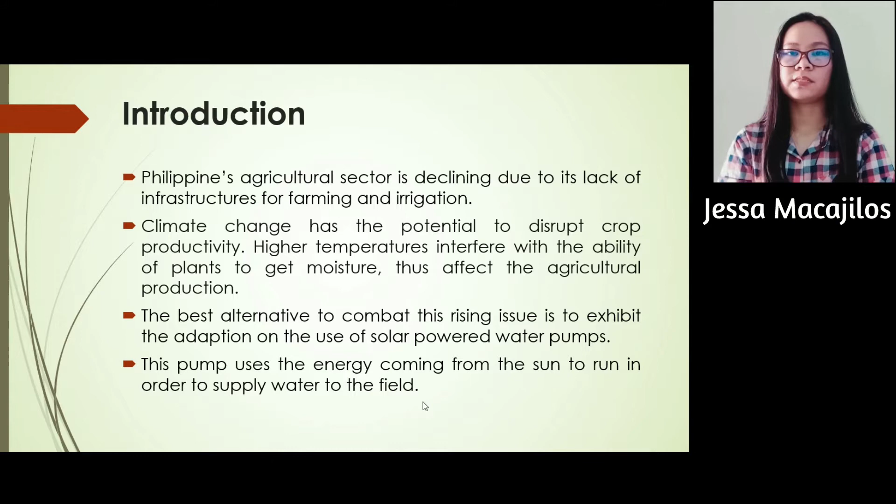The best alternative to combat this rising issue is to exhibit the adaptation and the use of solar-powered water pumps. This pump uses the energy coming from the sun to run in order to supply water to the field. An irrigation system that uses solar-powered water pumps is a great help to farmers, and it will give them hope that something better is coming on their way.

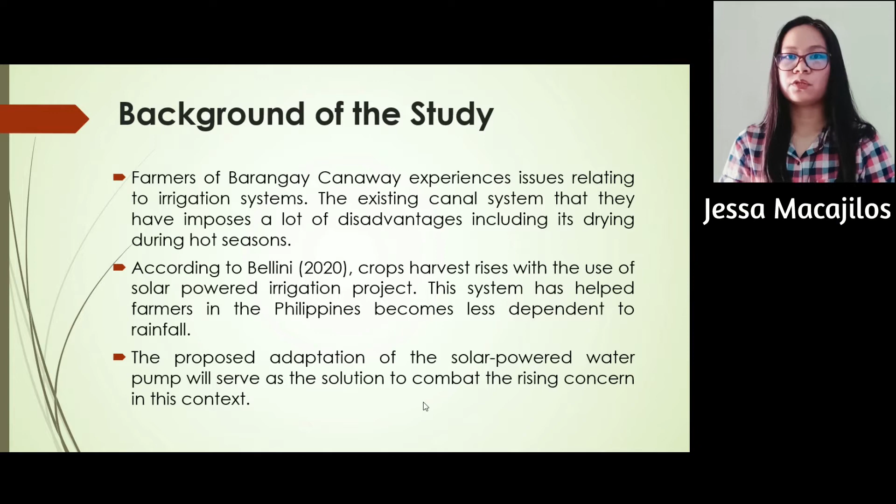Farmers of Barangay Canaway also experience this issue relating to irrigation systems. The existing canal systems that they have impose a lot of disadvantages, including its drying during hot seasons. According to Bellini 2020, crops harvest rises with the use of solar-powered irrigation project. This system has helped farmers in the Philippines become less dependent on rainfall. The proposed adaptation and the use of solar-powered water pumps will serve as the solution to combat this rising issue in this context. Statement of the problem.

This research study is solely based on the issue that the researcher wants to address. As stated, climate change has caused a tremendous impact to the lives and production of farmers. Every sector in the government is continually dealing on ways to address the concern. The constant rise of temperature due to global warming brings detrimental effect to the growth of crops. As a result, there is deficiency in food production.

Farmers in Barangay Canaway, located in a mountainous area in the municipality of Siaton, also experience this issue. This barangay houses different types of crops and vegetation that are affected due to global warming. The existing canal irrigation in the area imposes different risks and disadvantages, including the imbalances of the distribution of water, which lead to crop damages. On account of this, an adaptation to the use of solar-powered water pumps to power a drip irrigation in the area will be considered. Specifically, this research aims to answer the following questions.

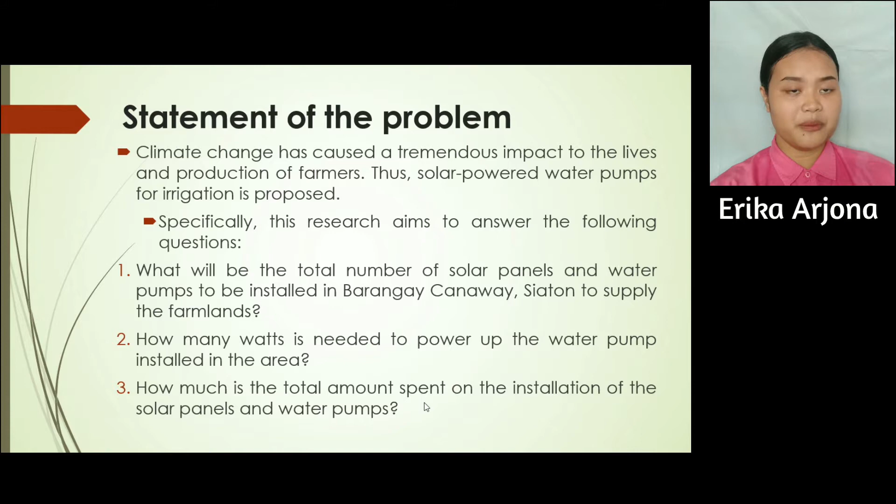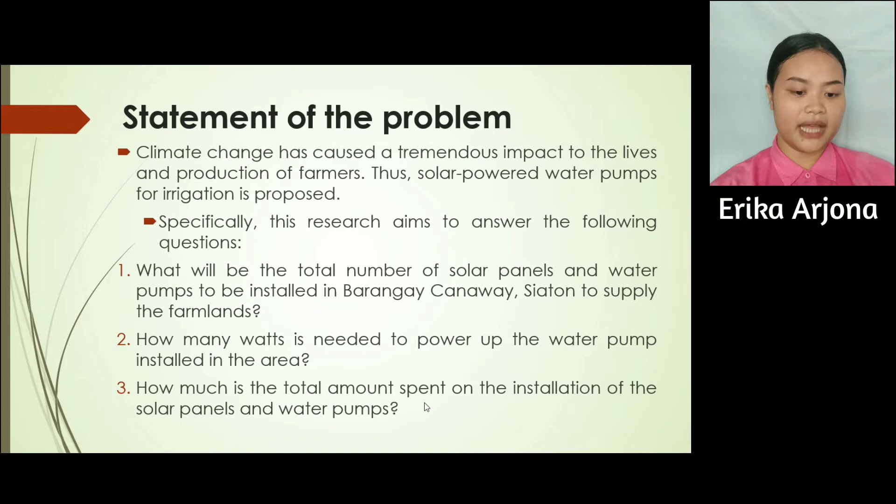First, what will be the total of the solar panels and water pumps to be installed in Barangay Canaway, Siaton to supply the farmlands? Second, how many watts is needed to power up the water pump installed in the area? The last one is, how much is the total amount spent on the installation of the solar panels and water pump? Scope and limitation of the study.

This study will focus on the adaptation of solar-powered water pump to supply the irrigation system in Barangay Canaway farmlands. Drip irrigation is used as a basis for this study because it is more efficient and has more benefits to the plants and to the system as a whole. For the purpose of this study, cornfields will be used. However, once the system is implemented, the operation will depend on the farmers on whatever type of irrigation and vegetation they want. The farmers of this barangay will be the respondents of the study where certain data will be gathered.

Moreover, it will provide the basic calculations to identify the number of solar panels required for a certain area of need as well as the water pumps. As this will focus only on the solar-powered water pump system, the implementation of the drip irrigation system will not be included. Implementation refers to how the drip irrigation is created. This part may be focused on for further researches.

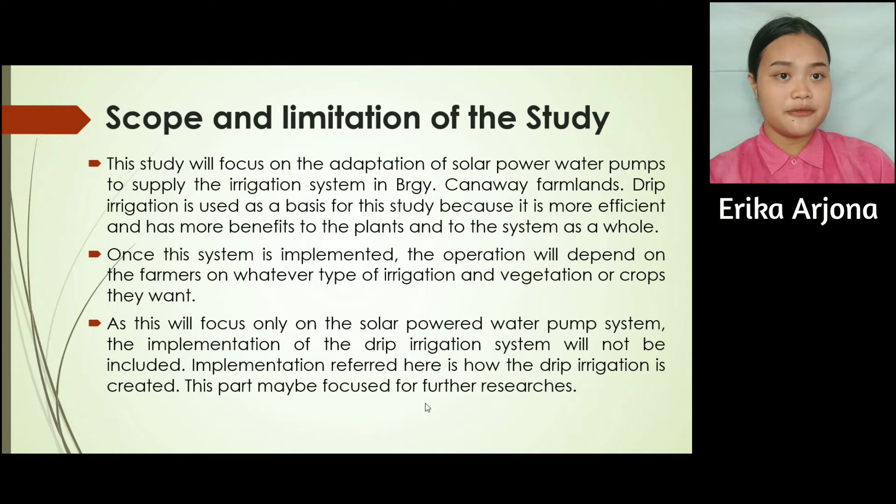The theory that is utilized in this study is based on the concept of the solar-generated electricity called photovoltaic and the working principle of the water pump. Photovoltaic system is composed of one or more solar panels combined with an inverter and other electrical and mechanical hardware that use energy from the sun to produce electricity.

French physicist Edmond Becquerel noted the photovoltaic effect, in which certain materials would produce a small amount of electric current when exposed to light. The smallest element of the PV panels is called the solar cell, also known as the basic photovoltaic cell. These cells combine together to form a panel which collects the renewable energy from the sun and converts it into electricity, which will then be used to power electrical load.

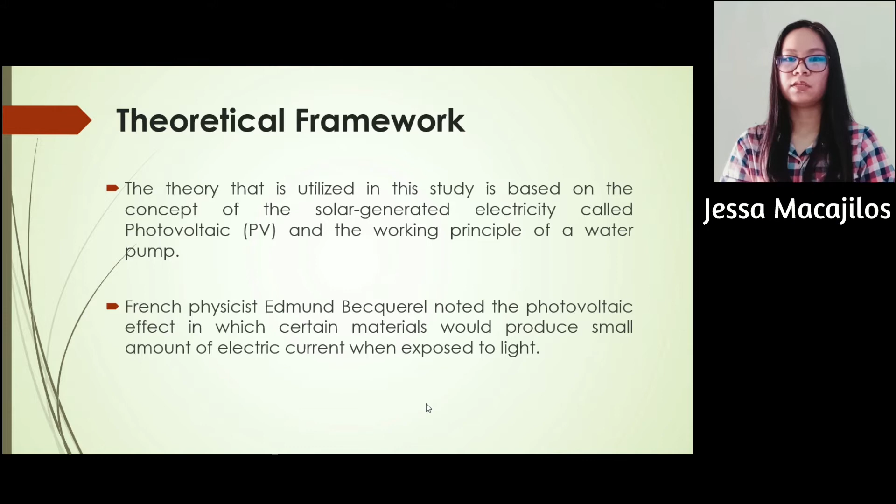The working principle of the water pump depends upon the positive displacement principle as well as the kinetic energy to push the water. The solar-powered water pumps integrate the combination of the two concepts concerning solar energy and water pump principles. The electricity produced will be used to power the entire system.

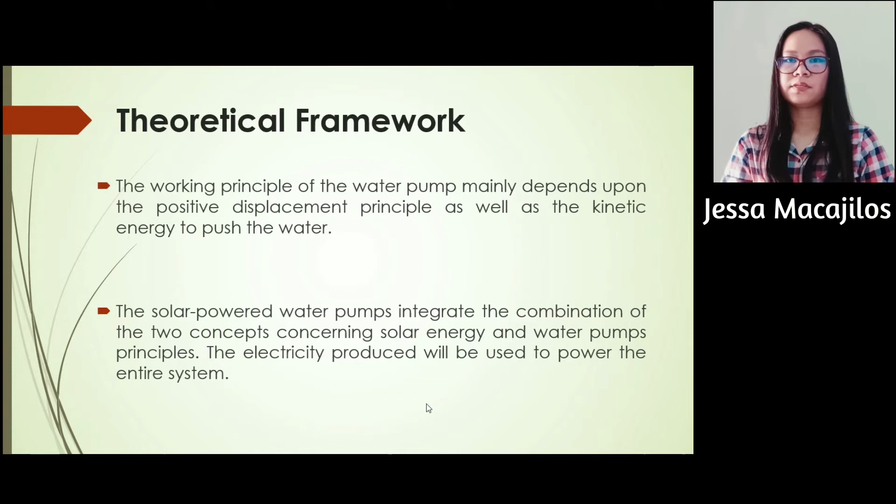The system will work through the utilization of the power coming from the sun through the use of photovoltaic panels. These panels convert light from the sun into electricity to be used to power loads. The amount of electricity generated will be dependent on the solar radiation of the place where the solar-powered water pump will be installed. Intensity of the sunlight striking the panel is affected by weather conditions and the topography of the area where the proposed system will be installed.

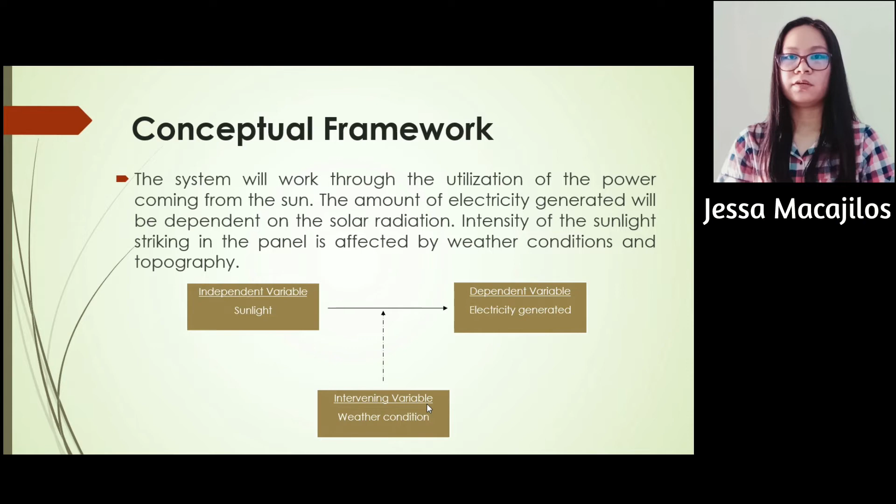The charge controller present is set to control the voltage and current to prevent batteries from overcharging. It regulates the voltage and current coming from the solar panels going to the battery. A rechargeable 12 volt battery is involved in this system so that electricity can be stored and the pump would still function even though sunlight availability is constrained.

Power is supplied by the batteries for operating the system. Water is pumped by the surface solar water pumps from the river to a storage tank, and the water is then drawn to the drip irrigation system to deliver water to the crops and vegetation.

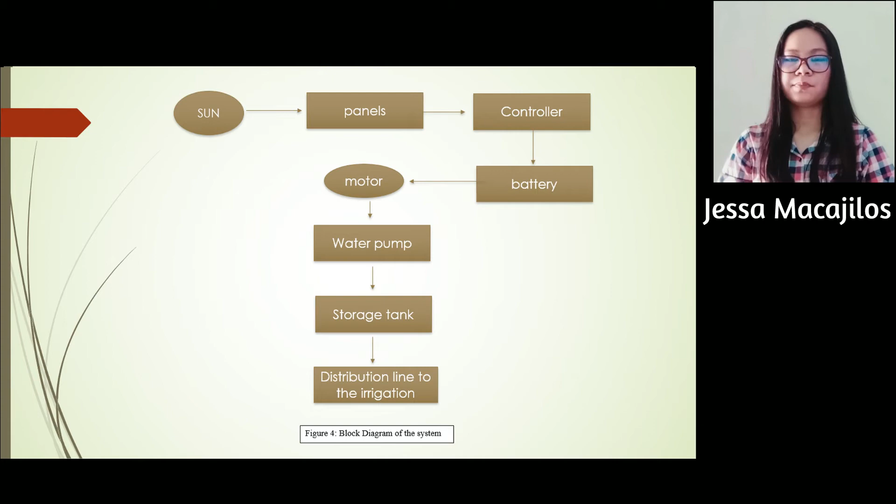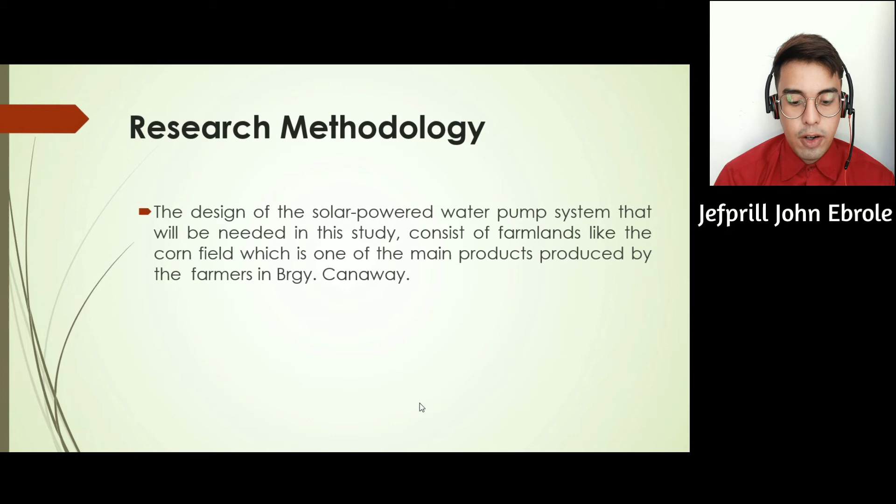As I said earlier, this will be conducted in Barangay Canaway. There is a need to first identify the water that will be needed to supply the total needs per day in the area. To determine the total water requirement in the area, there is a need to calculate the total water needed and the type of plant that will be supplied with the system.

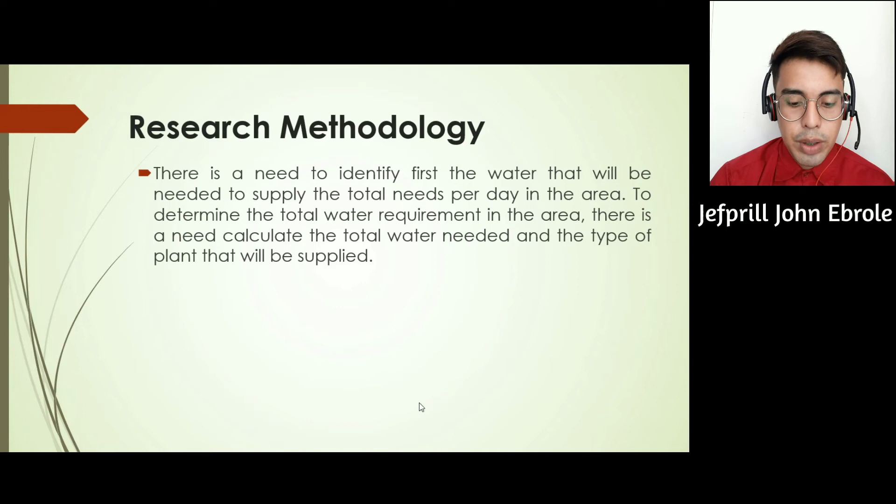The researchers have decided to use the corn plant because Barangay Canaway is one of the main producers of this product. The total area that will be supplied by the solar-powered water system will also be considered, for instance, 1 hectare of cornfield. To calculate the water requirement, get the number of corn plants and the corresponding approximate water needed per corn to grow.

According to the data from the Food and Agriculture Organization, corn plants need approximately 6.1 millimeters of water per day. Millimeter of water referred is the pressure exerted at the base of the fluid, exactly 1 millimeter. For 1 hectare of land, there are approximately 10,000 corn plants.

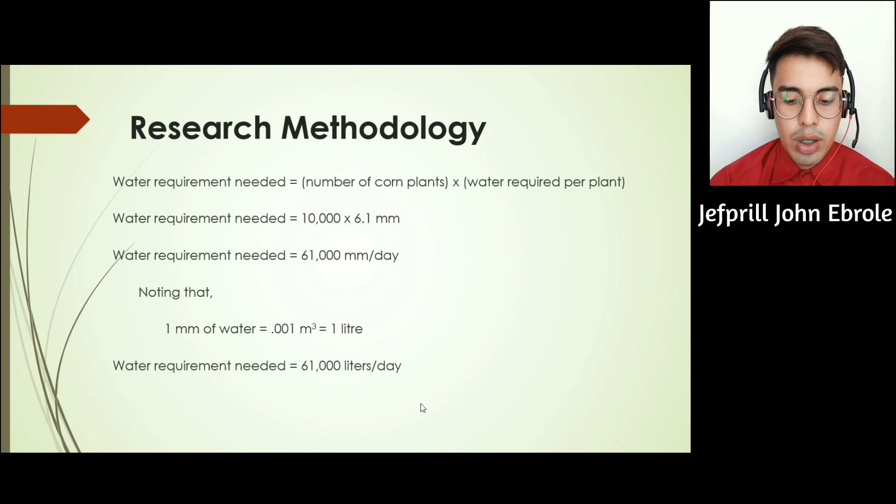Assuming 1 meter distance per plant, the water requirement needed is equal to the number of plants times the water required per plant. Then we substitute the values, for example 10,000 plants, and the water needed per plant is 6.1 millimeters. Multiplying that, it will be 61,000 millimeters per day. Noting that 1 millimeter of water is equal to 0.001 cubic meters, and it is also equal to 1 liter, the water requirement needed is equal to 61,000 liters per day.

Next, the researcher needs to determine the layout of the entire solar-powered water pump system, which includes the location and elevation of the water source, the pump that will be used, PV panels, storage tanks, and the areas where the pipelines will be placed. The location of the PV panels will also be a great factor in the whole water pump system. There is a need to consider that the area has less obstruction of shadows to have a more efficient system.

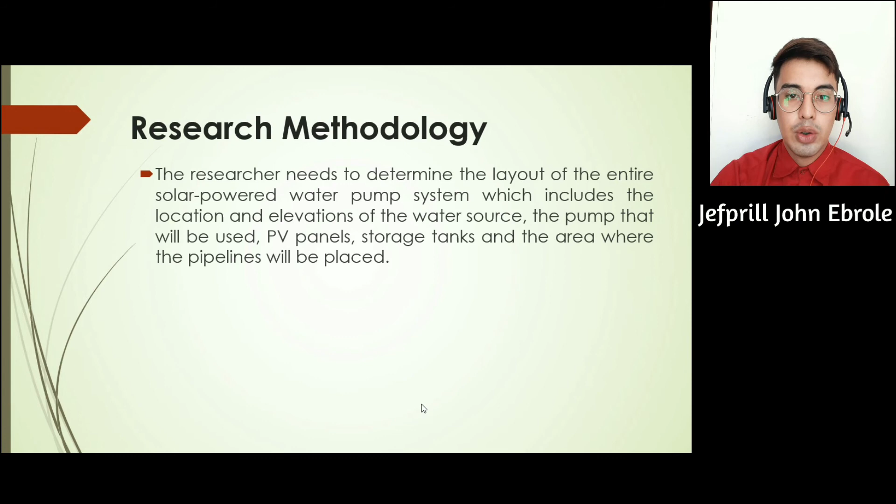There is also a need to put into consideration the safety of our equipment in the system. To have additional safety, it is essential to put fencing around the system. Identifying the type of water pump that will be used is needed so that the flow rate of the pump can be computed. To compute the flow rate, first compute the total amount of water needed per day divided by the total daily solar insolation in minutes. It is suggested that the solar insolation will be 6 hours, from 9 a.m. to 3 p.m. per day, as this is the time when solar energy is mostly supplied considering the location.

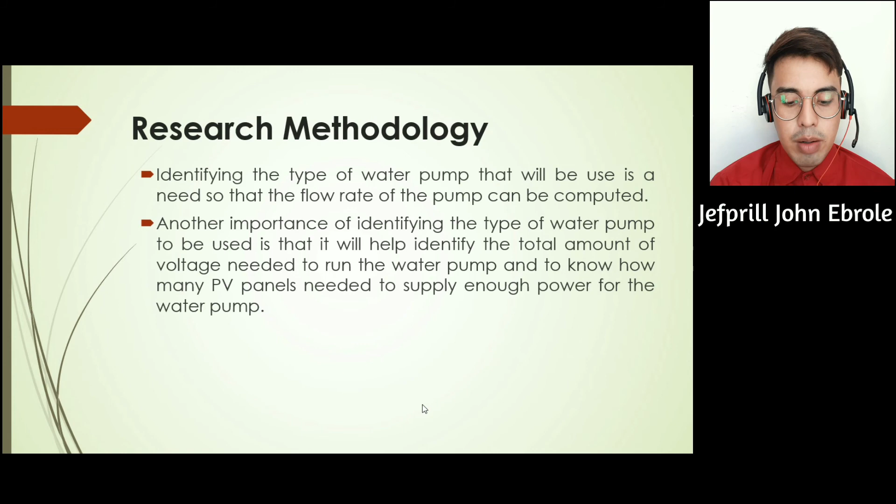Another importance of identifying the type of water pump to be used is that it will help identify the total amount of voltage needed to run the water pump and how many PV panels are needed to supply enough power for the pump. To compute the total voltage needed, multiply the voltage needed per pump with the total number of water pumps that will be used.

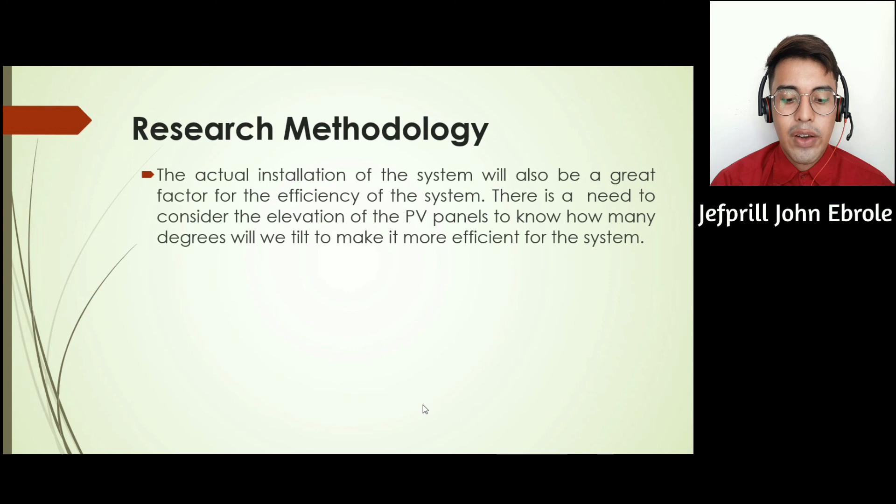Next, the actual installation of the system will also be a great factor for the efficiency of the system. There is a need to consider the elevation of the PV panels to know how many degrees they will be tilted to make the system more efficient. Tilting the PV panels about 30 degrees is recommended for better efficiency. The time of the day and the month will also affect the efficiency of the system, because different times also mean different sun peak hours.

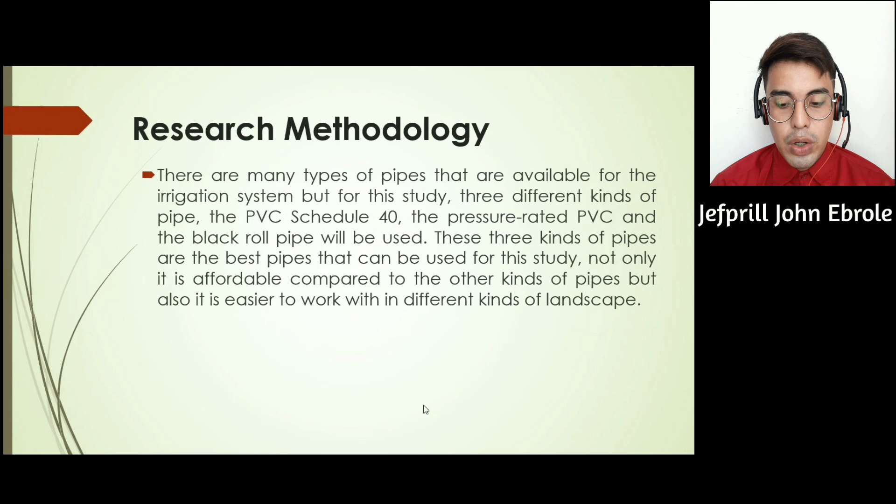Now, we will be talking about the pipelines that we will be using in this study. There are many types of pipes available for irrigation systems, but for this study, we will be using 3 different types of pipelines: PVC Schedule 40, pressure-rated PVC, and black roll pipe. These 3 kinds of pipes are the best pipes that can be used for this study. Not only are they affordable compared to other kinds of pipes, but they are also easier to work with in different kinds of landscape.

Finally, after gathering all the data mentioned earlier, installation of the system can be exercised. Still, the total cost of the installation of the system will need to be identified. To determine the total cost, add all the expenses of the materials that will be used, which include the number of PV panels, the number of water pumps needed, and the length of the three kinds of pipes that will be used in our system. The cost will also include the labor of the installation.

Researchers need to identify the number of people that will be working, which includes the number of electricians in charge of the electrical installation, the number of plumbers in charge of the pipeline installation, and the number of construction workers in charge of the construction of the place where the PV panels will be placed. So that's it for the research methodology in our research proposal.